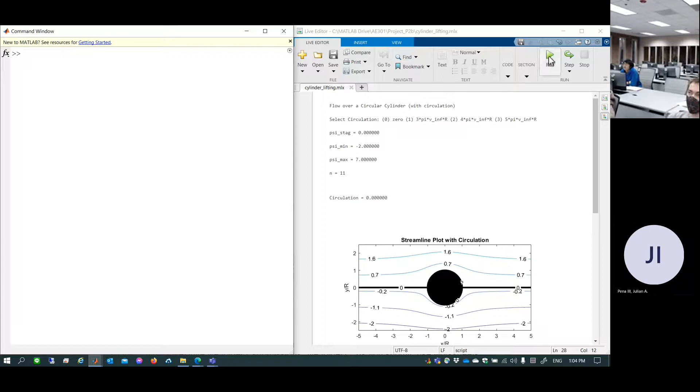So I purposely developed it in Live script. If you translate a Live script into a script, that's a skill. It deserves some points. So I don't care if you do it. Okay. So let's just run it, okay?

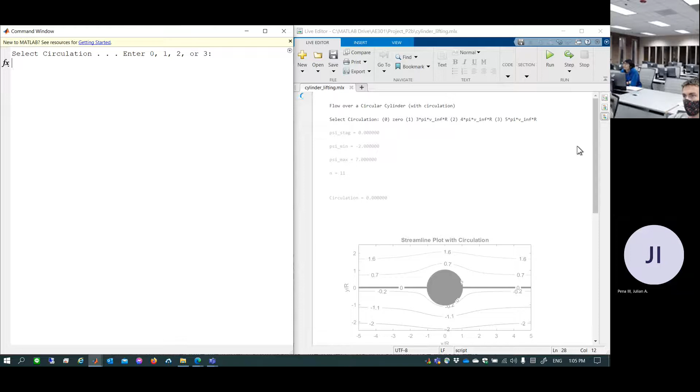So first of all, you're going to select the circulation. Obviously, project 2A, circulation 0, right? No lifting. And then project 2B, you're going to start adding circulation for the flow field. 3 different kinds of circulation: 3 pi V infinity R, 4 pi V infinity R, 5 pi V infinity R. You have 3 patterns of stagnation points. So let's just run one at a time. I'm going to enter 0. This is going to be no spin.

So what is the stagnation streamline? 0, right? Let's plug in the correct value. Minimum streamline, it could be any value, but I take the default. Maximum streamline, it could be anything, but I take the default. How many streamlines? 11. So if you do that, you're going to run this. This is a streamline plot for 0 circulation. Psi equal to 0 is the stagnation streamline that follows the surface of the circular cylinder, representing the body.

And then if you plot upper and lower surface CP distribution, CP negative in the positive y direction. CP equal to 1 stagnation point at the leading edge, CP equal to 1 stagnation point at the trailing edge, both upper and lower surface CP distributions exactly the same. So there's no difference of pressure between upper and lower surface. So if you compute the area bounded by upper and lower surface, it is going to be 0. Theory also says it must be 0.

If you compute it using a numerical integration method out of those data points, the CL calculated is 1.5443 times 10 to the minus 16. Very, very close to 0. But there are small tiny errors. So percent error is infinity. Why? Because theory is 0. Something divided by 0 is infinity. So anyways, suppose you run it again, let's add in circulation.

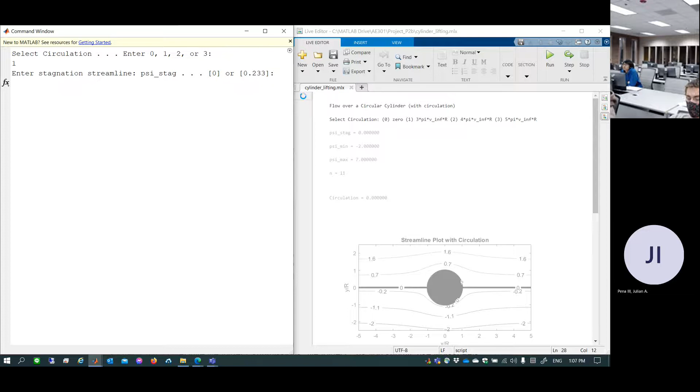So I'm going to start adding circulation 3 pi V infinity R. What is the stagnation streamline? Are you working on project 2B? It's still 0. Type in 0. Minimum, maximum, 11 streamlines. It's just a plot.

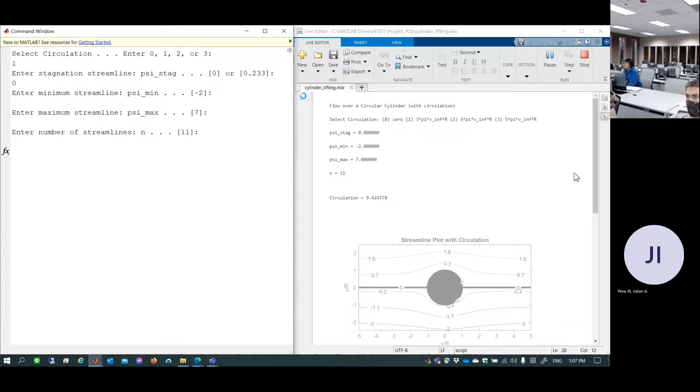So this is the streamline plot for the circulation 3 pi V infinity R, 2 stagnation points here and here. Psi equal to 0 is still the stagnation streamline, because if you still have a stagnation point on the surface of the circular cylinder, this is going to plot the circular cylinder shape. So this psi equal to 0 line goes over the surface and flows away.

This is now the upper and lower surface CP plot. Now you can see the upper surface has lower pressure, of course. Because CP negative on the upper surface means you have a lower pressure distribution. Lower surface, you have a higher pressure distribution. So the area bounded by those two upper and lower surface curves is going to be, what is it? Lift coefficient, CL, yes. So in project 2A and 2B, you have to calculate the area. How to do that?

Well, you have to read the document. It's a numerical integration method, something called the trapezoidal integration, central difference scheme. Do you understand? I hope so. And then, if you compute based on the data points given, CL calculated is 9.4186 and CL theory is 9.4248. How did you get CL theory?

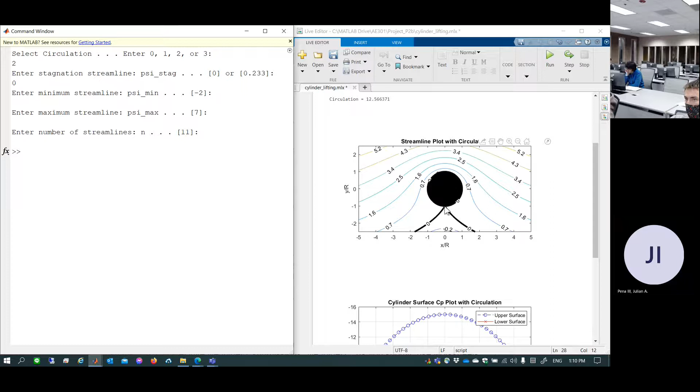This time, I'm going to select the circulation 2, which is 4 pi V infinity R. What is the stagnation streamline? Again, 0. Minus 2 to 7, 11 lines. So if you do such a thing, now you are going to plot. Here we go. So this is the streamline plot. Single stagnation point right here, theta equal to negative half pi. Psi equal to 0 still. This is going to flow over the surface of the circular cylinder, psi equal to 0. This is going to still show the circular cylinder shape because stagnation point is still on the surface of the circular cylinder.

Now this is the CP plot on upper and lower surface. Again, upper surface is going to be lower pressure than before, and then lower surface getting high pressure. So pressure difference is getting bigger, so you have bigger lift coefficient. Now CL calculated 12.55. CL theory is 4 pi. That's 4 pi, 12.5664. Okay. Now next, last one.

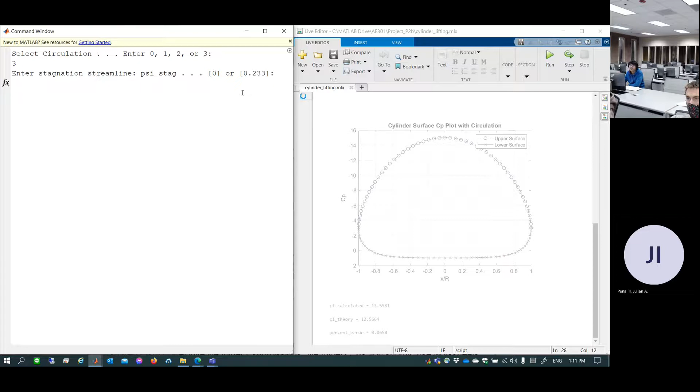Select the circulation. This is 5 pi V infinity R. So what is the stagnation streamline? I'm guessing 0.233. Oh, you're guessing 0.233. Didn't you get this in your homework? Not yet. I hope you do that. 0.233. How did you get that? You have to find out in your homework. I'm not going to do it. You have to do it on your homework. Anyway, so please do your homework first before project.

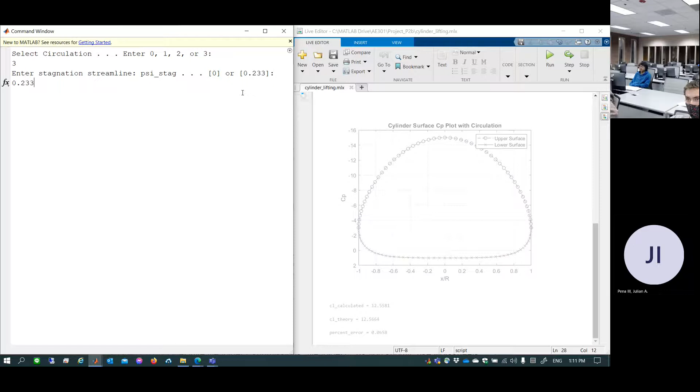Anyway, so psi equal to 0.233. Sounds like this is stagnation streamline. Minus 2, 7, 11 lines. Go ahead. Is the maximum 3 for circulation? Maximum could be anything. Circulation in this case is 5 pi V infinity R. So 3 is just a selection. This 0 is a 0. 1 is 3 pi V infinity R. 2 is 4 pi V infinity R. 3 is 5 pi V infinity R. Just a selection, okay? I should have used like A, B, C, D, E. Anyways, don't be confused by that kind of stuff.

So this circulation is 15.70. This is the stagnation streamline, psi equal to 0.233. How did you get that? Again, you have to do your homework. This is the stagnation point right here. It's no longer on the surface of the circular cylinder. So in order to represent the circular cylinder, you have to literally plot the equation of the circle and put it on top of your flow field. Or you can plot psi equal to 0, because psi equal to 0 is still a circle. So you have to include both psi equal to 0.233 and psi equal to 0. Then you can completely describe all the flow field streamlines.

And then here is again the CP plot on upper and lower surface. If you integrate, you can get CL calculated, and you compare against CL theory. CL theory in this case is 5 pi. So this is something you need to be doing. Project 2B, which is, when is it due? I don't know. After Thanksgiving sometime.

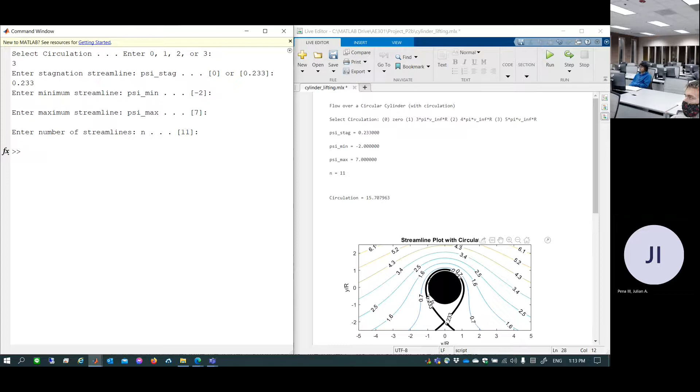Cool. Or I don't know. It's up to you. Go ahead. Question. Yes, my question is, for calculated, is it the worksheet of flow over cylinder 2? For calculated, so like the formula for your calculated version? Lift? Yes, not the theory.

The theory is, yeah. CL calculated is essentially this area bounded by upper and lower surface. Oh, so you have to calculate it from the graph? From whatever your calculated data points, not the graph. I mean, how many data points do you have? It depends. You can plot the same CP distribution with fewer data points or more data points. Depending on number of data points, this calculation will change.

In other words, if you have fewer data points, this is going to introduce more errors, because this is essentially numerical integration to determine this area bounded by upper and lower surface curves. It's called numerical integration, trapezoidal method. You have to read the document. Okay, please read the document. Right, project 2A document includes that trapezoidal integration method. I hope. Is that right?

I think it's project 2B. That's not 2A. Okay, sorry. Project 2B. 2A is just 0, so. Yeah, because it's 0, you don't have to. All right. Ah, okay, too bad. Percent error.

Okay, so anyways, that's the difference. One is numerical integration result. The other one is simply gamma over R V infinity. That's the theoretical equation which we derived in last class. Any other question? So like I said, this is a project 2B code. I'm not going to provide the answer, period. But I showed you in the class.

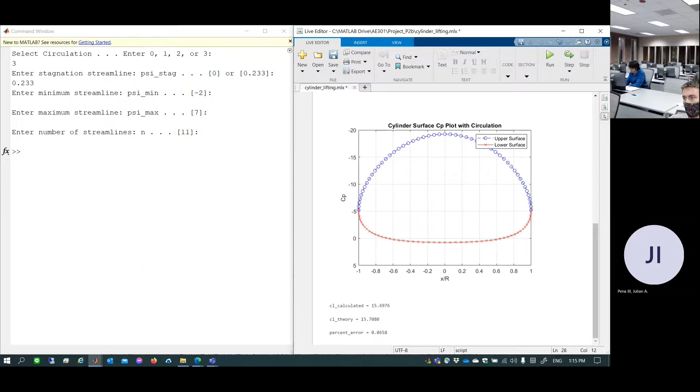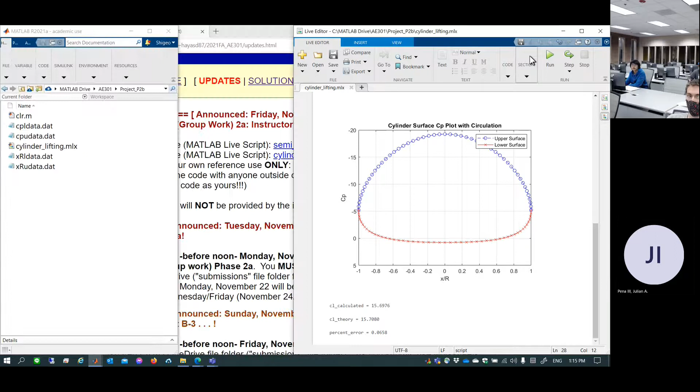Go ahead. When are you thinking that project 2B should be due? I don't know. It's negotiable. Two weeks from now? Well, shouldn't we decide on the due date for B4 first? I guess so. Because today, I hope I'm going to finish up B4. B4 is kind of required. And then, do you want to know the due dates of B4 homework? I guess, I mean, we need.

Monday, maybe we talk about it. Because Monday, everybody's online day. We still have a lecture, so we can discuss it if you show up. You are part of the discussion on Monday if you show up. So let's talk about it Monday, if you bring it up. Okay.

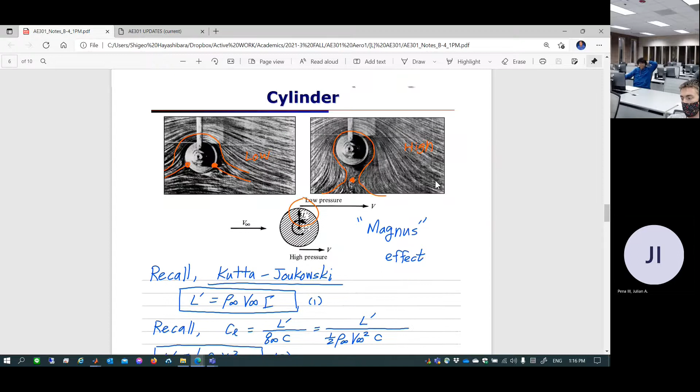So let's move on today. Finish up Unit B for today. That's what I want to do. So in last class we talked about this lift coefficient. If you add the circulation to the flow over a circular cylinder, it is going to create the lift coefficient. Now, this is actually compared against the real flow. This is called the Magnus effect.

If you have a spinning circular cylinder, you're going to create a side force. I have a video. It's like a half entertainment video. I hate to show this, but let's take a look at it, okay? This is the Magnus effect video.

We're here at the Gordon Dam, and what we're going to do is demonstrate from the very top the effect of spin on a ball. So we're going to get a basketball and drop it from 140 meters up, one without spin and one with spin, and see what happens. Just dropping it with no spin, as you could see, the ball was sort of doing a sway thing, so it wasn't going directly straight. It was pretty hard to predict where it's flying. Ready? Whoa, look at that go!

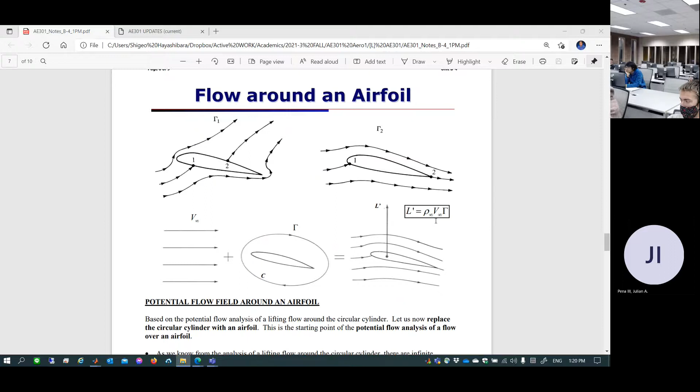This is going to happen when you start using the software. The software you are going to pick up for project 3, A and B, and some of you are already using. What is the software you're using? XFLR5. That is actually called a panel method. A panel method is code where you design your own shape using a bunch of straight edges to represent your shape. And each one of those straight edges is made up by a vortex. Okay, point vortex. A series of point vortices arranged on a straight surface, and then you basically shape your body.

So how many data points do you use to represent your shape? If you have 20 data points, the shape looks like this. All right? If you use 100 data points, it's going to be a little bit smoother. If you use 1,000 data points, it's going to be very smooth. But still, it's a simulation. It's not the exact shape. It's not a super smooth surface anyway. If you really zoom in, it's just a series of straight edges creating a smooth looking surface. So anyways, that's called the panel method.

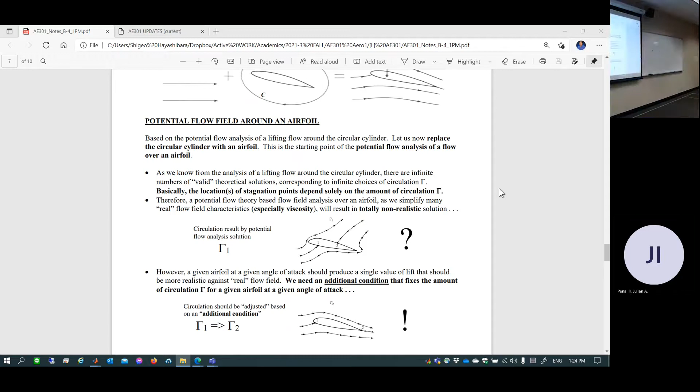I still cannot see. Anyways.

So let me repeat once again. This is your project. You control circulation to change the stagnation point. XFLR5 and other panel methods are going to constrain the realistic position of the stagnation point so that you are going to constrain the realistic value of circulation. What is the realistic location of the stagnation point, you think? Trailing edge and somewhere in the leading edge. Yes. Right? Okay, so this is not right. This is something I want to see.

So we need to add one more physics on top of just the solution that you can get. Every single panel method actually has this physics added onto it. What kind of physics do you think it is? The key word, which is super important, guaranteed to show up on the final exam. What is this physics you have to add to make this flow field more realistic? That is, realistically, here's a stagnation point, here's a stagnation point. The flow field should be like this, right? Viscosity? Viscosity is completely ignored. This is the panel method, still ideal flow.

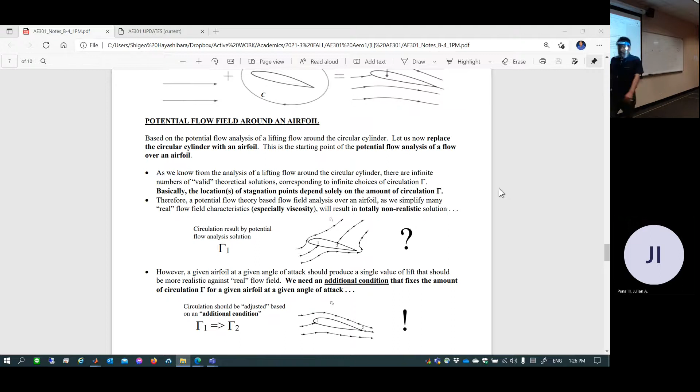No. One physics that you have to add, very, very important terminology, guaranteed to show up on the final exam. Circulation. Kutta condition. This is so important. Whenever you use panel method-based software, you have to understand this. If you don't understand this, you are not qualified to use that software. The Kutta condition is a very, very important additional constraint so that, realistically speaking, flow needs to depart at the trailing edge smoothly. That's what nature does.

Have you ever seen a flow field like this? No, right? Flow cannot turn like that and flow away. It's impossible. Only ideal flow can do it. But real flow can never do such a thing. Real flow always departs at the trailing edge nicely and smoothly. Do you know why? It's very difficult to explain why, but nature does such a thing. Somebody discovered this is something nature does. Who's that somebody? Kutta. So that's why this is a super important discovery.

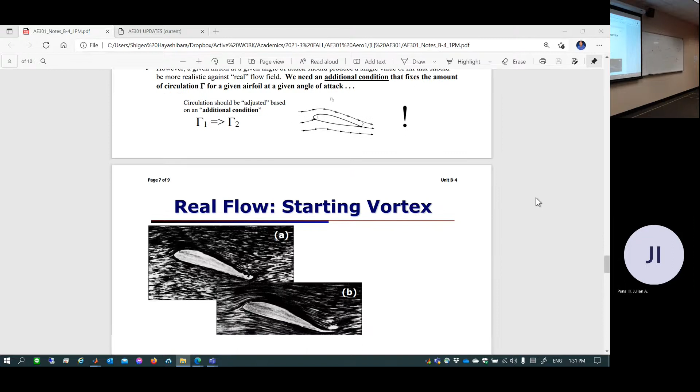And that is going to be added onto this solution. But this solution, ideal flow itself, is something weird already, isn't it? So we have to add one more condition. That is called the additional condition. So somebody actually said, well, this is not right. So how does nature actually adjust such a thing?

Somebody observed. Who's somebody? Prandtl. Prandtl observed the real flow field. Interestingly, this is some kind of shape, a cross-section of a wing. Initially, nothing is moving. Let's say this is a water tunnel or something. At time t equal to 0, you turn on the wind tunnel or water tunnel. Flow all of a sudden starts to happen. Flow gets in, flows over it, flows away.

If you observe very carefully, something happens. This is called the starting vortex. So let's take a look at the slow motion, one thing at a time. Flow gets in from left to right.

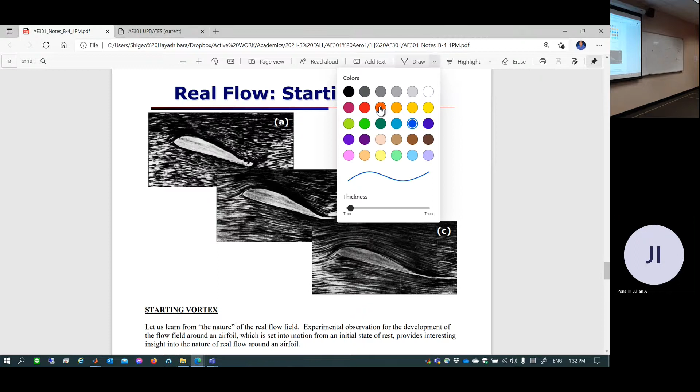By the way, today's lecture is probably priceless. You're probably not going to hear this kind of thing ever again in your lifetime, guaranteed. If you're paying a huge amount of tuition, today is the day, the reason why you're paying tuition. Do you hear that? You have to recognize those kinds of moments.

So when you turn on the flow field, the flow gets in, right? Originally uniform flow. But because of the shape and angle of attack, obviously the flow accelerates. And then, as you can imagine, you see this kind of thing start happening. This is a temporary stagnation point right here. And then this temporary stagnation point starts flowing downwards.

So this temporary stagnation point starts flowing, and right here, right now, this thing is going to shed off, and then goes away. As a result, the excess amount of circulation from the flow field is all removed. So the result is a very smooth departure at the trailing edge.

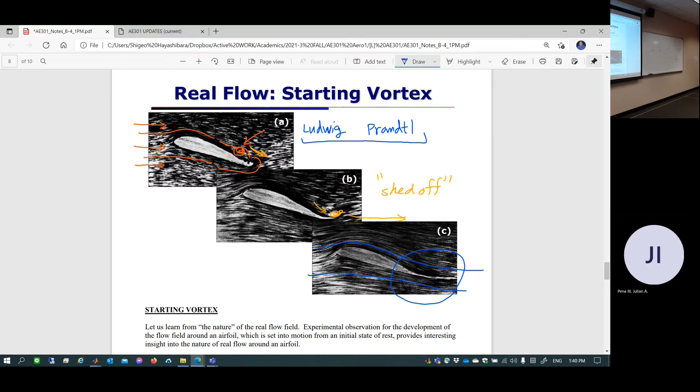This actually sets up the Kutta condition. And the Kutta condition adjusts the proper amount of flow field circulation so that you can use this solver to predict the lift coefficient. But still, this is implicit. You have to turn on the viscosity if you want to simulate the surface pressure and surface boundary layer formation, laminar transition to turbulent. Again, the transition model, it's so easy to make things complicated, right? Anyway, let's just understand the very basic grassroots-level concept of circulation theory.

So I noticed that in each of those videos, it was just at the startup where it circulates, but not constantly. No, once you start up, you establish this steady-state flow field, right? And only at the beginning do you adjust this circulation. That's why it's called the starting vortex.

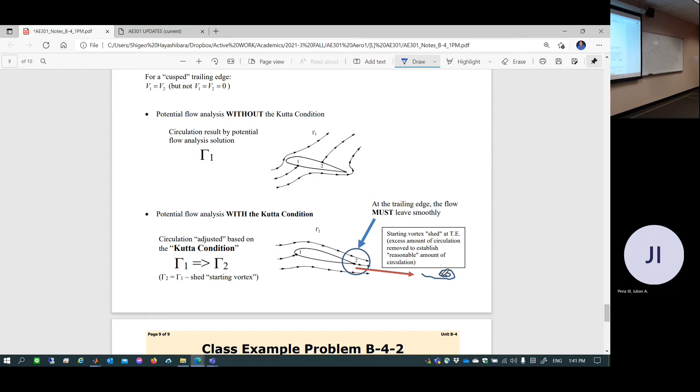Okay, right. So with the Kutta condition for the cusp, it says the velocities are equal to each other. Does that mean the directions are also equal? That's right. Parallel and the same exact magnitude, because you have a trailing edge with continuously changing angle. So parallel and equal to each other. That's how it makes a smooth departure of the flow at the trailing edge.

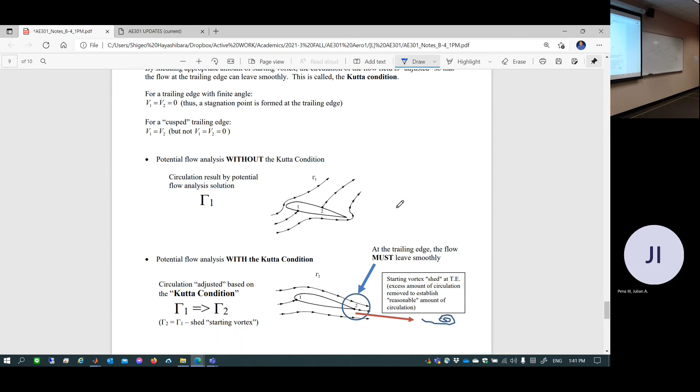Okay, so this is important. Whenever you run XFLR5, here's the important thing. When you import an airfoil data set, are you going to import it as is into XFLR5? There's a problem. X over C, Y over C. Have you ever seen airfoil coordinates? Yeah, this kind of thing. You can download it from anywhere.

Problem: the trailing edge. X over C equal to 1 needs to be a single location. That's a clearly defined trailing edge. But most of the time when you import your data set, it provides two data points, not quite at X over C equal to 1, because it's a cusp, just continuously moving toward X equal to 1 but never there. If the trailing edge is open like this, your code never runs. Guaranteed. Be careful when you do project 3.

Are you aware of it? Okay, I hope so. So sometimes you have to literally create the trailing edge data point, X over C equal to 1, right here. Otherwise, your imported data just continuously goes toward 1, but not quite. You have an open trailing edge. If you import something like that into your panel method, it never runs.

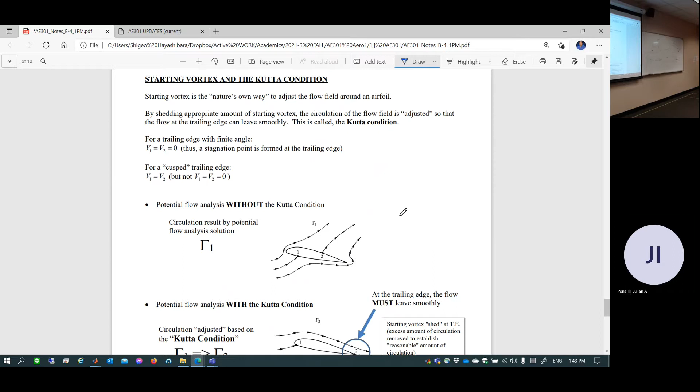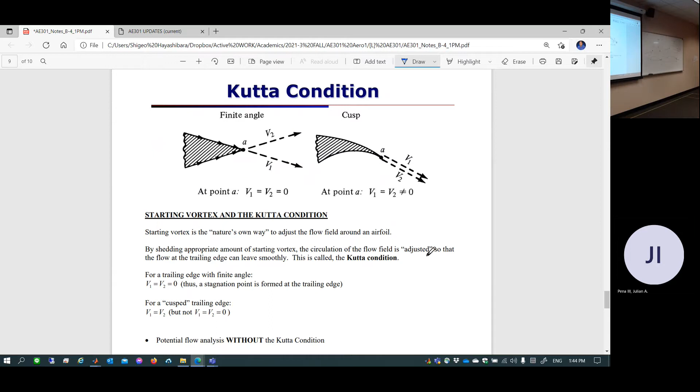Because why? Because you can never do Kutta condition. Guaranteed it's not going to run. Be careful. Project 3: this is toward the final week, so I cannot help you. If you are not here today, not listening, not paying attention, it's your problem. I cannot help you. So that's one of those important things. Make sure you have a trailing edge well defined. Otherwise, you can never enforce the Kutta condition. Period. Okay. Big hint.

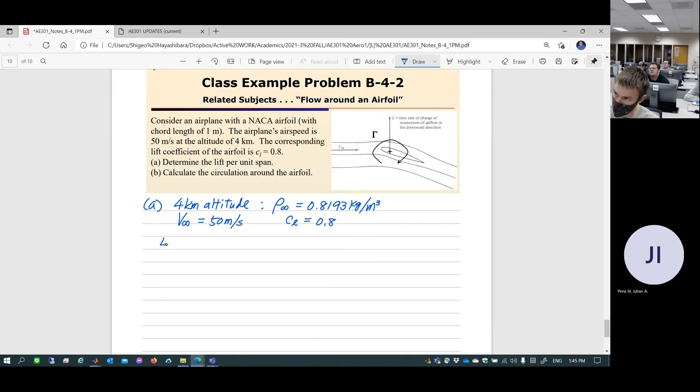Okay. It's actually a very simple deal. So let's say part A. 4 kilometer altitude. You're going to compute standard density at 4 kilometers: 0.8193 kilogram per cubic meter. This is density at the standard 4 kilometer altitude. Airspeed is 50 meters per second. Lift coefficient is 0.8. This is probably from wind tunnel testing. So how much lift per unit span are you creating? CL times 1/2 rho V squared, that's q, times chord length.

Oops, 5 more minutes. Let's just finish up. 1/2 times density 0.8193 kilogram per cubic meter, times airspeed 50 meters per second squared, times chord length 1 meter, times CL 0.8. So this gives you how much lift per unit span you're producing: 819.3 newtons per meter.

Is that CL the theoretical CL? CL is, when you do wind tunnel testing, you determine CL, the lift coefficient. Is that your question? Yeah, I thought the CL was the same as L prime over q infinity. Right? Is this your question? Yeah, this is the definition of CL. That's right. Okay.

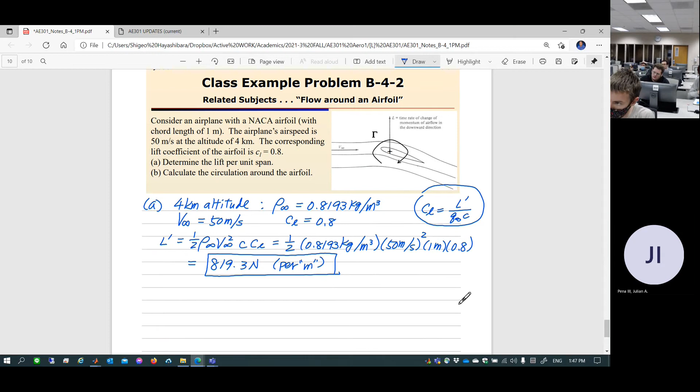Part B: Kutta-Joukowski basically says that L prime is rho infinity V infinity gamma. So interestingly, compute how much circulation you have in order to produce this much lift per unit span. Just out of curiosity, I'm going to compute how much circulation you have. 819.3 newtons per meter, density 0.8193 kilogram per cubic meter, airspeed 50 meters per second. So how much circulation do you actually have? 20 meters squared per second. This is the circulation corresponding to lift coefficient 0.8.

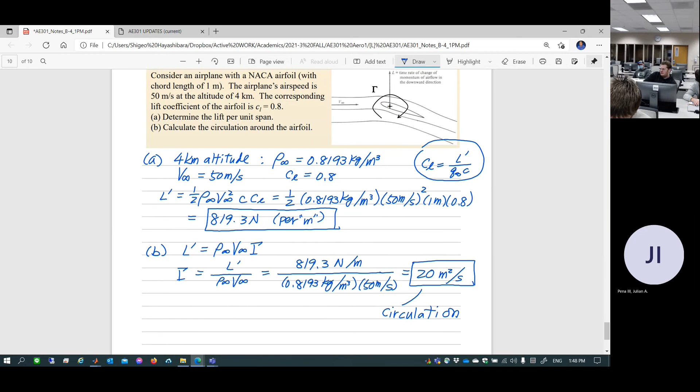Your software actually does the exact opposite of this. You design your shape and then place it at an angle of attack with a certain Reynolds number condition. The software computes the circulation with the Kutta condition imposed. If you can compute that, you can determine the lift coefficient of your designed airfoil cross section, and that's exactly what the software does. The complete opposite direction of this example problem. So this concludes unit B4.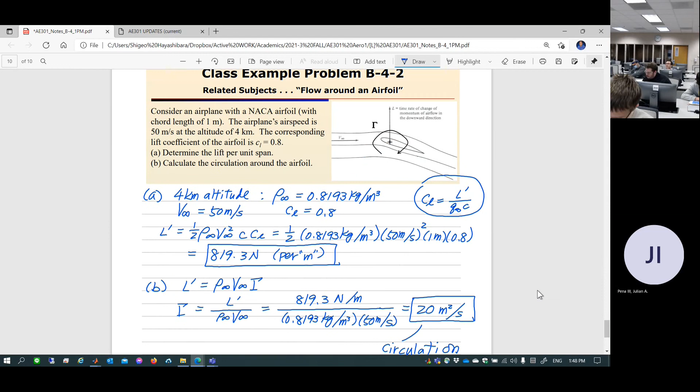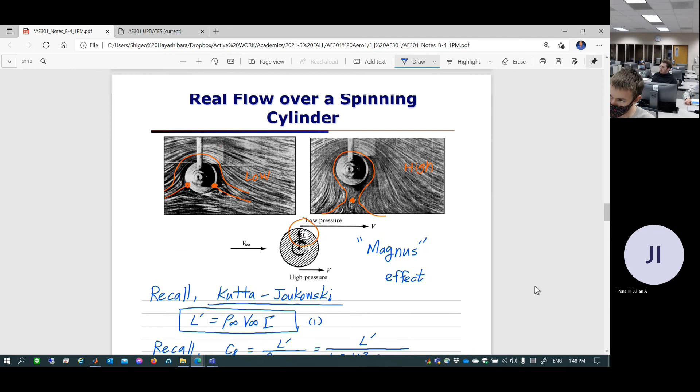Lift coefficient is always the lift per unit span over q infinity C. In this case, C is 2 times the radius, since this is a circular cylinder. It's the same thing. This is the original definition of lift coefficient, and this is the lift coefficient of the circular cylinder with circulation gamma. The circular cylinder chord length is 2 times the radius. Any other question? Go back to the last page. Okay. Any other question?

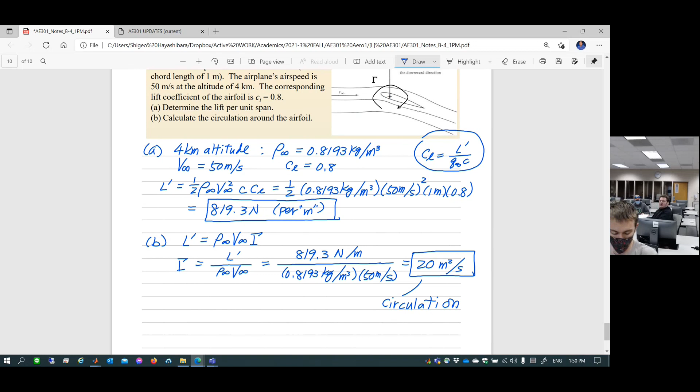Yes, I only have one file. This was a mess today. It's not